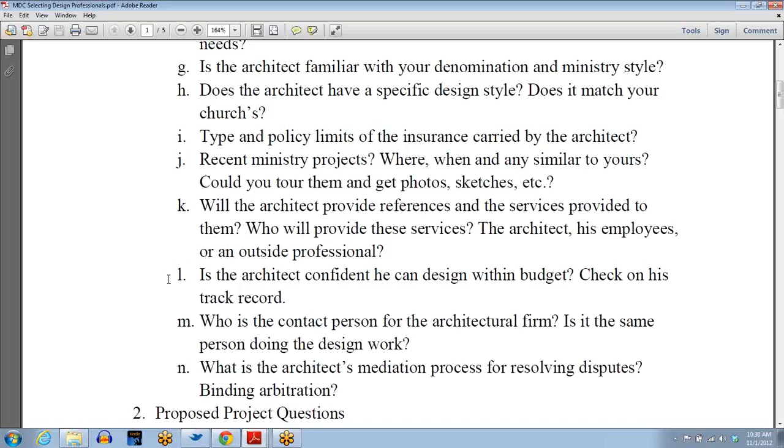An important question is: is the architect confident he can design within budget? So you want to, don't take his word for it, check on his track record. Another question I would ask, if you could hunt up churches that he designed plans for that were never built, to find out why they were never built. All you're trying to do is see who works with diligence and is persistent and consistent to work with churches who design buildings that they can afford and do choose to build.

Now, before you're too hard on the architect and engineers, there's a lot of wheels in motion here, and a lot of them are not controlled by our friends, the architects. These are very fine men that I've worked with, and my personal friends, not just friends as an industry professional or industry partner. And so I don't want to malign them in any way in this. I just want you to make wise choices. I have no axe to grind with anyone. I simply am representing Christ and his church.

Now, is the architect confident he can design within budget? So what you're asking him to design and what your budget is, as we've gone through those steps, he needs to look at that and make certain that he can do it. And what are you going to get? A Chevy, Buick, Cadillac, or a blend of those three together in some way?

Another question to ask him is, who is the contact person? Is the same person doing the design work? Comes back to my earlier comments about one guy you're talking to and somebody else is doing the work, and you don't end up with it going well. So if that architect's going back to his studio and is working with the engineers and his design team and he is hands-on, you probably have a better chance to get the building designed as you related, as you communicated, as you desire it, than you will if there is a gap between and the guy taking the information's not on the scene.

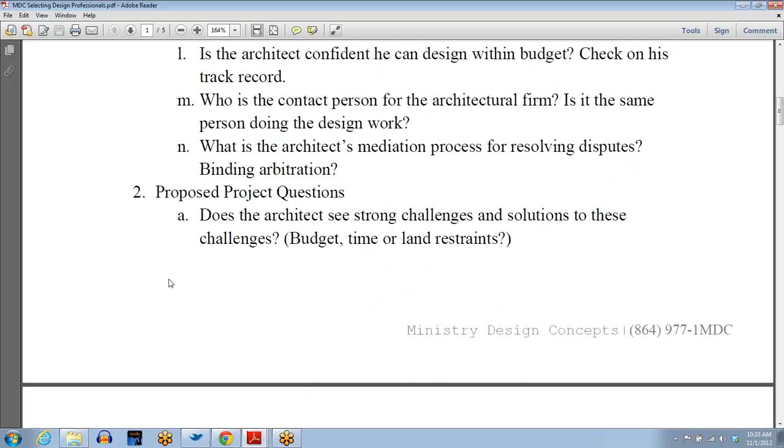Proposed project questions. What do you ask them when talking about your project? Does the architect see strong challenges and solutions to these challenges - budget, time, or land constraints - as he looks at your project? Before the architect meets with you, has he done any homework to look at your land and any restrictions, your zoning, anything he might need to know to talk with you squarely? Because he is vetting your project while you're vetting him, screening him. So does he see anything there?

How does the architect understand the church's value, vision, mission, game plan, goals, and constraints? Can the architect explain this in his own words? One way to make certain he is understanding who you are, your ministry design, and your wishes is to have him repeat those back to you. So once you've given it to him, wait and meet again or call and ask him to repeat back to you, ask him questions that get him to show what he knows. What has he retained of what you've told him? That will go a long way toward helping you understand how he's going to retain and synthesize all the information to give you the building that you want.

Can the architect meet your design schedule? You hire a guy and he takes 12 months to get the design ready, but you wanted it done in 4 months. Talk to him about the design schedule.

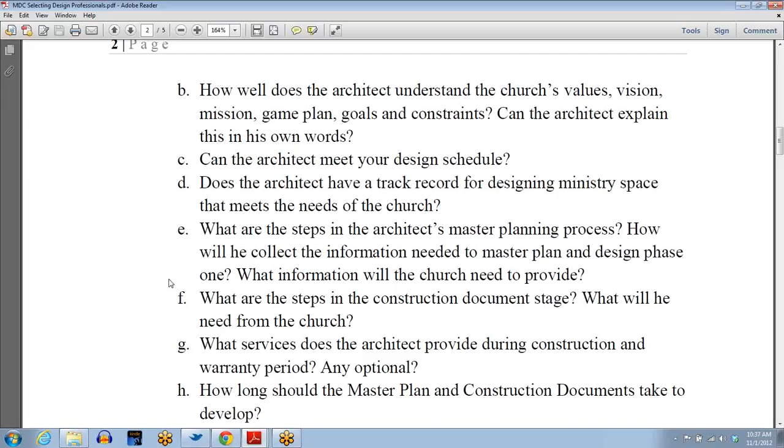What services does the architect provide during construction and the warranty period? Is it separate from his construction drawings and master plan period? You want him there, by the way, but you want to know what he charges and how often he's on site, what kind of support he gives.

You want to know what kind of support he gives regardless of the delivery system you're providing—design-build, design-bid-build, or construction management—because the subcontractors are going to have questions. Is the architect going to be involved and willing to answer those questions, make clarifications and decisions, so the subcontractors and suppliers can get their questions answered.

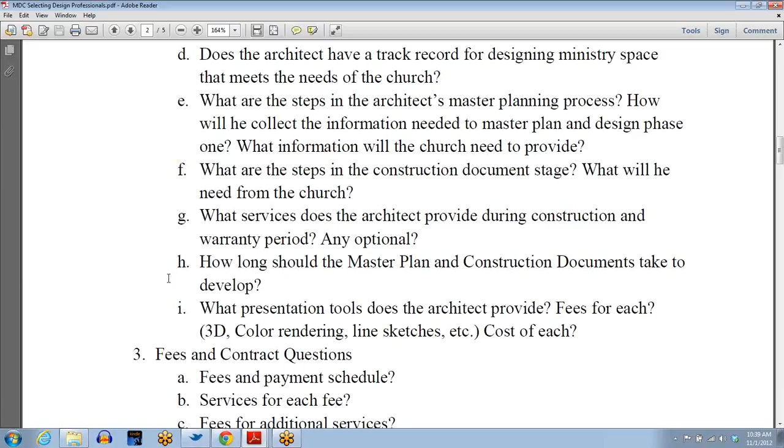How long should the master plan and construction documents take to develop so they're ready for stamping and permitting? What presentation tools does the architect include, and are they in-house or out of house? Is he subcontracting that work, or does he have staff producing it? You want to know who's doing the work and providing the services—is it the architectural firm, or is he employing others, or letting them contract directly with you? You just need to know, because he who holds the contract holds control. You might save money, but you might also lose control. So look at your cash and your control, the risk they're taking and the rewards you get.

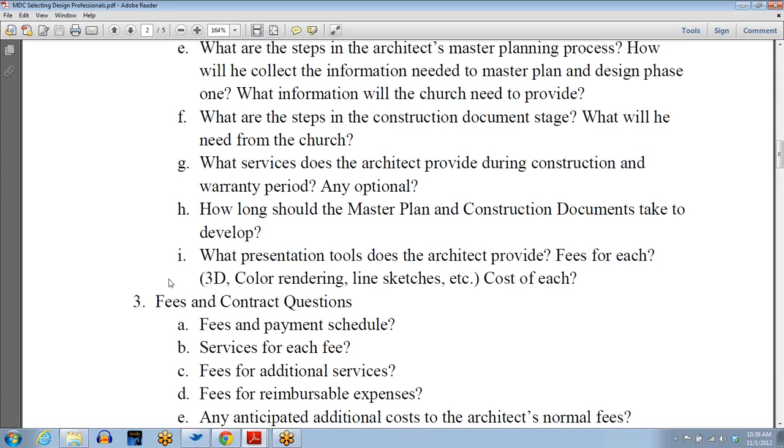Now moving to fees and contract questions. What are his fees and payment schedule? Is he going to front-end load you with fees and payments? Is he going to nickel and dime you through expenses? Make him break down his services for each fee, and fees for each additional service, options of adding services, and reimbursable expenses.

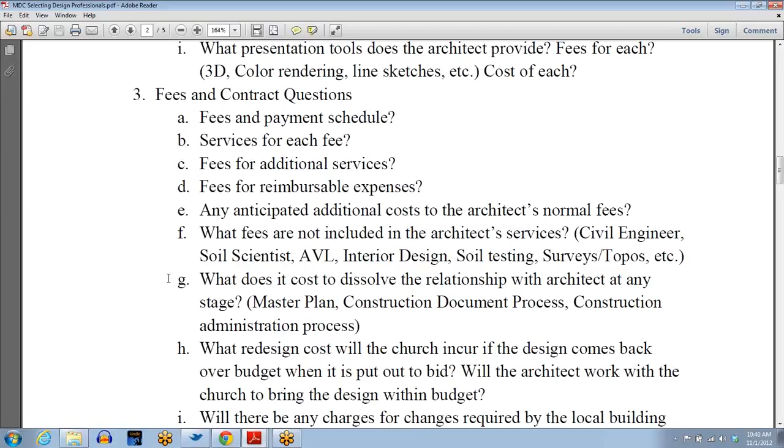If you have him come back to you over and over and he lives 150 miles away, he's going to charge you a mileage rate. If he has to spend the night, he'll charge for lodging and food, and you want to know what those are—any anticipated additional costs to the architect's normal fees.

What fees are not included in the architect's services? I've listed some choices there for you. What does it cost to dissolve the relationship with the architect at any stage? What redesign costs will the church incur if the design comes back over budget when put out to bid? Hopefully we're heading that off by doing updated cost estimates as we go through the process. Is the architect going to work with the church to design within budget?

Why do I harp on that? The reason is that from talking to numerous Christian architects—men who know the Lord and design churches—not one has told me the percentage of churches whose designs come back over budget when put out to bid is under 50%. I've been told as high as 75% of the time, when an architect designs a set of plans without a builder who has skin in the game estimating the cost and holding accountability, it comes back over-designed 50 to 75% of the time.

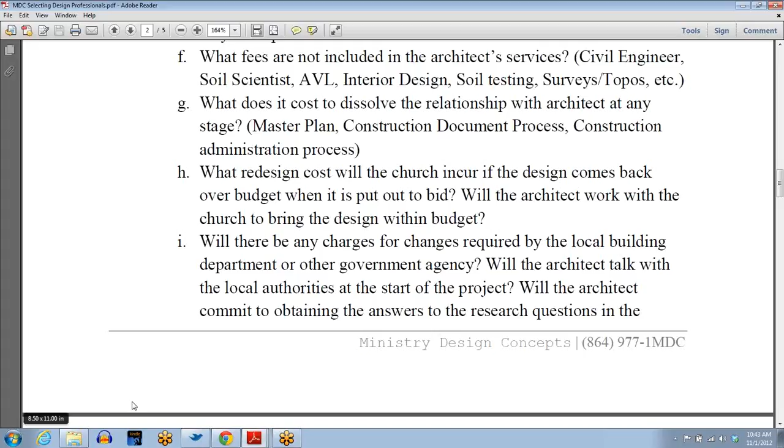Will the architect commit to obtaining the answers to the research questions in the master plan research questionnaire I've given you, or will he design first and research afterwards? You don't want one that does the design and then goes to research it to make certain that it's within design. Get one who will take the time to research it and get confirmation of all the things in the questionnaire I gave you on the master plan research questions.

I gave you 23 questions. It was taken from this site selection questionnaire, and that's a 9-page document full of questions. You want to make certain they're not just designing it without thought of doing anything other than taking your money, because you want to be able to build it, don't you?

What is the fee structure or fee schedule for change orders after the plans are complete? You change your mind, the government changes their mind, the architect had mistakes in the plan that had to be changed during design. That costs money. Catch them during the design phase, not during the construction phase.

You're likely going to have one or many change orders that require the architect to adjust the plans. What charges do you incur from him for that? His fault, your fault, the government's fault, nobody's fault—it happens. What are you going to be charged? Who is financially responsible for correcting errors and omissions in the design?

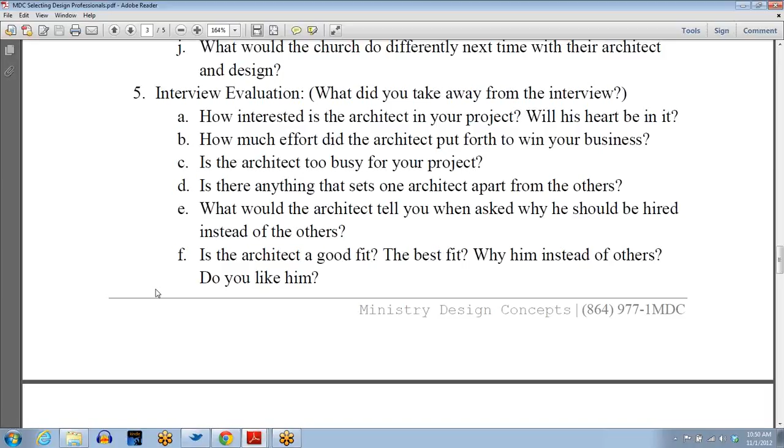Is the architect a good fit, the best fit? Why him instead of others? Can you explain that to your congregation? Does the architect understand you? Will he be easy to work with and put the interest of the church ahead of his own interest?

Here's the truth, what I call a truthity. Some architects are great salesmen. They interview very well but perform poorly. Other architects interview poorly but perform great. You've got to get behind the curtain to see what kind of work they're producing right now, and estimate whether or not they fall into one of these categories. Because there are guys who interview poorly and perform poorly, or interview great and perform great. You've got to find out who that is by being an investigator.

Is the architect qualified for your project? Now let's move from that and talk about another area: civil engineers. You can hire an architect that lives in Kansas while your church is in Alabama, and he can design the building according to the codes and so forth with the engineers. But when it comes to a civil engineer, you want a local engineer who is dealing with the environment right there and kind of has his hands in the dirt. If you understand what I'm saying, you want a local guy.

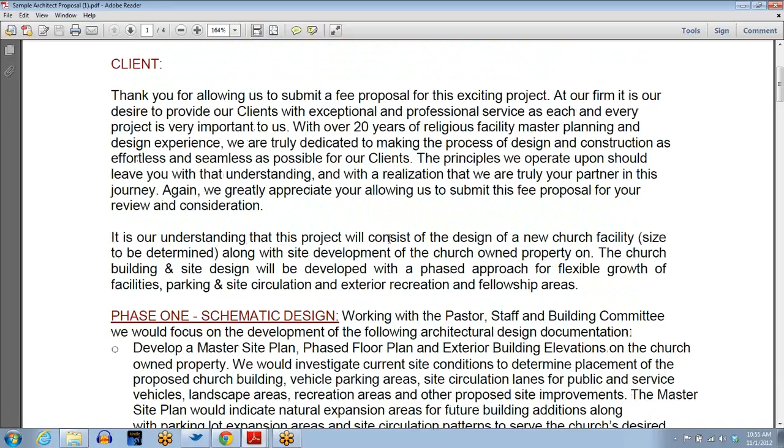This is a sample proposal. As you read down through it, you may find they tell you their firm is excited to work with you, that they've been designing religious facilities for X number of years, and that they operate upon certain core values that guide the way they serve you. They give you an understanding of what they think the project consists of—what work, size, cost, and so forth.

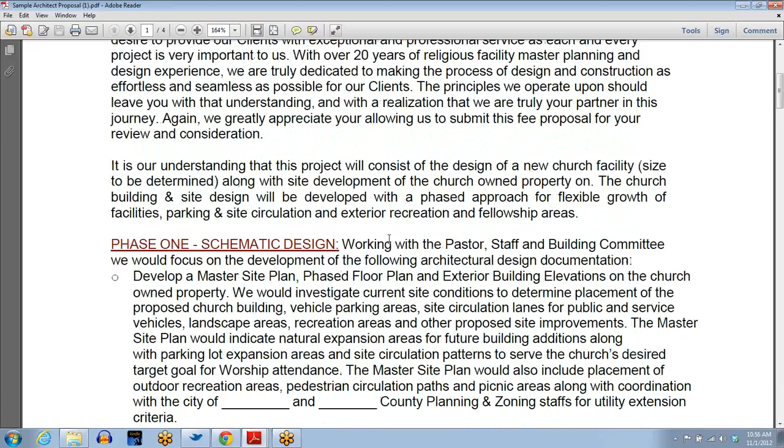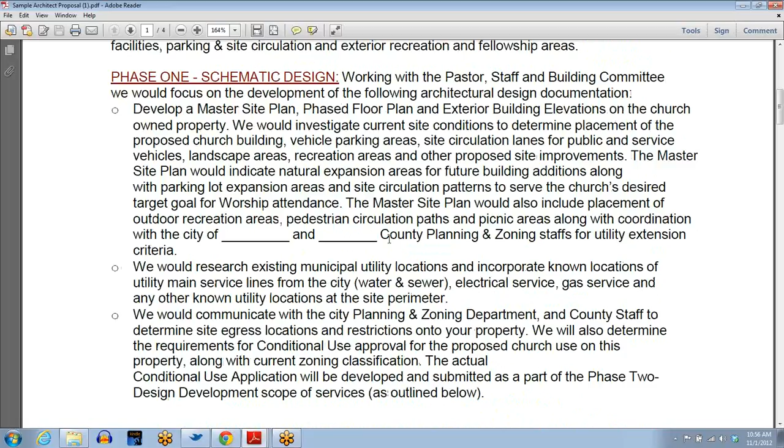Again, this is just a sample, but they'll put those in the first couple of paragraphs, perhaps. Then they'll talk about the master plan—they may call it a phase 1 schematic design, so it's a master plan with a floor plan, an elevation, and a site plan. They'll mention working with the local government authorities, the church, and anyone else involved.

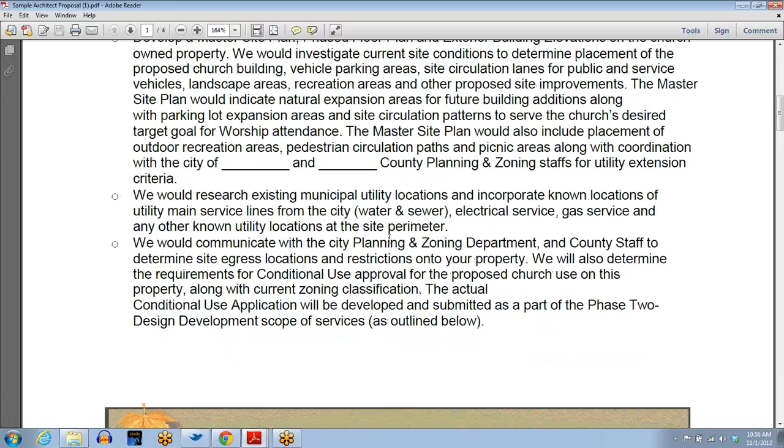They're going to research the existing municipal utility locations and work with the Board of Zoning and Appeals, the Planning and Zoning Department, and the county or city staff, going through and doing their research. That's what they're telling you in the proposal. So those questions I was asking, these guys are answering part of them in this sample, and I want you to see what it may look like.

Now, this particular sample used our MDC long-term planning vision for the church campus and the church facilities planning questionnaire. These are things I had given to a church to do, and this sample included those. So in my navigation, I'm providing these so you can give the architect the information he needs—part of your training to help you prepare to go through the master plan.

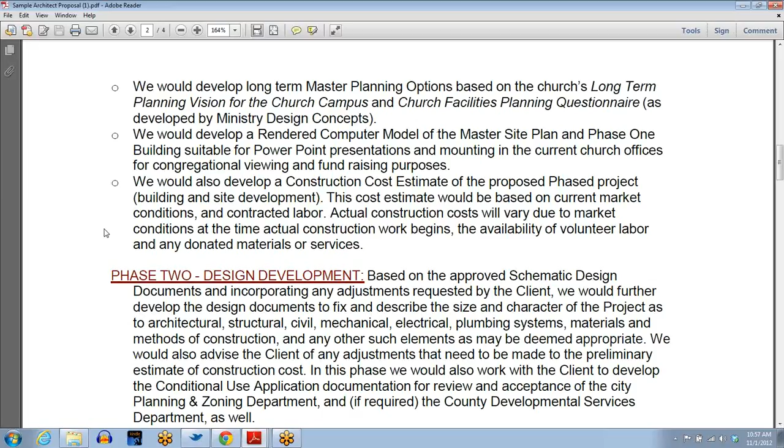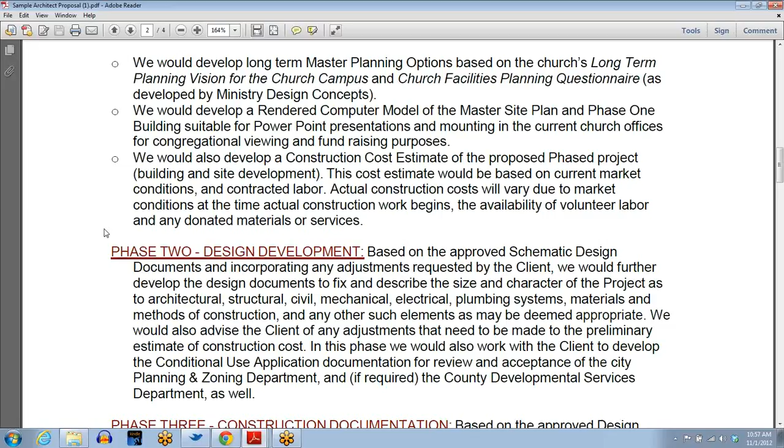He's telling you what he's going to provide: we would develop a rendered computer model of the master plan in phase 1, and we'll develop a construction cost estimate. Here the architect is doing it—but I'm telling you to get builders involved, either one you've hired who works with the architect during master plan, or 3 or 4 general contractors who, for the privilege of bidding your project, give you real cost estimates as they're developed, all to keep your building within budget and help perfect the design. Phase 2 is design development.

This is where they're going to go through, and it's kind of in between the master plan and the construction documents. They're tweaking it and doing some other things, working with the local government to make certain that what you're planning to do is within it, and they're determining the size, aesthetics, and character of the project so that you're aligned.

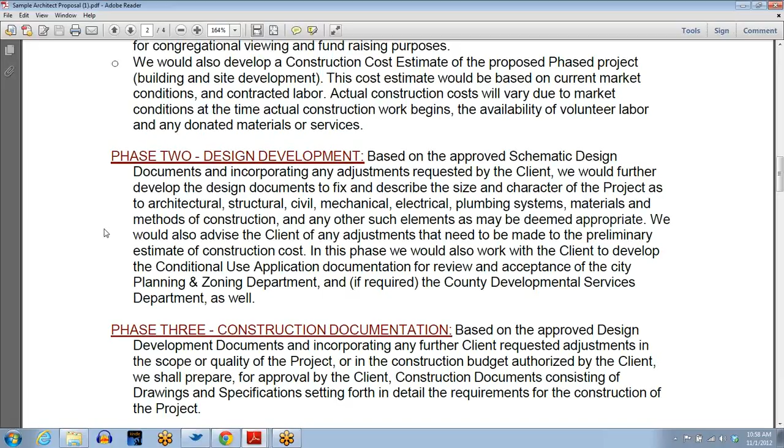Again, it's a step to help you move toward phase 3, which is the construction documents. Once you get to this phase, you don't want to be changing things during the construction document phase. You're doing that during phase 1 and 2, hammering out and finalizing your decisions.

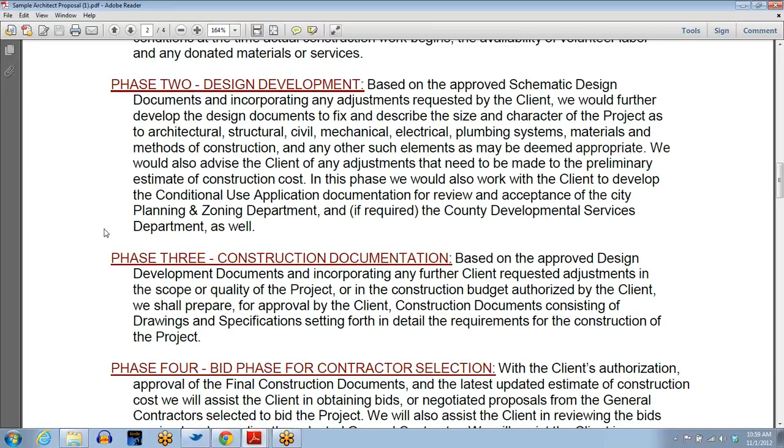The architect's giving you time for your decisions to marinate and for you to meditate on them, so that you've thought through how you're going to use the space and tried to walk through his plans in your mind's eye, considering the ramifications of every cubic square inch of your facility.

Because when you get to the construction drawings, if you come back and keep making changes, at some point they're going to start charging you redesign fees, since you didn't do it during the first two phases. You wanted to wait and not really bear down on yourself during phase 3.

Now, if I'm your pre-construction navigator, I'm helping you do this and facilitating it as a helper. I'm not an architect and I'm not a builder. I'm a pastor who has built churches and worked professionally as a project consultant for nearly a decade to help churches through this. That's my role - a consultant, a coach, a navigator.

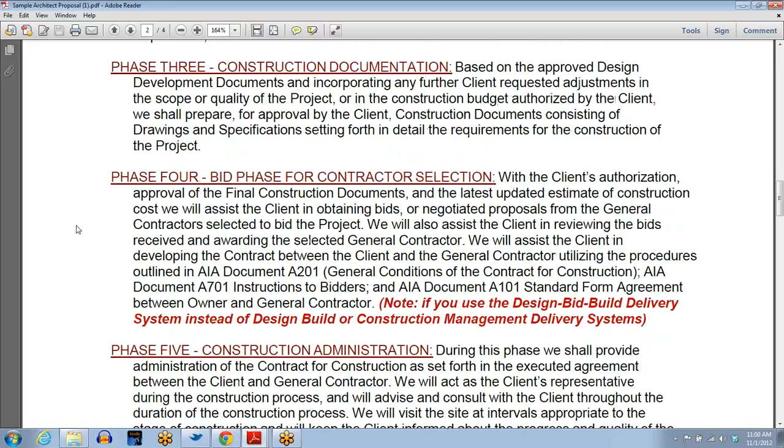Now you get to phase 4, where you're bidding it out to 3, 4, 5, or a whole bunch more general contractors who are going to give you a price. So depending on the delivery system you've used, you've got a bidding process.

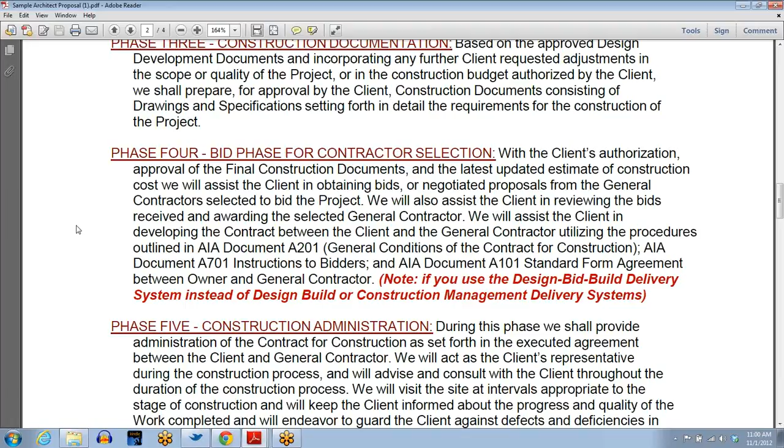You have a bidding phase with construction managers. You probably have one with the design-build guys as they pull together and put together the bids, but you may not have any access to them. And certainly with the traditional way - design it, bid it out, and build it - you have a bid package that goes to the general contractors for them to give you prices. It all depends on which delivery system you use.

And then there is the construction administration phase, during which the architect will serve you for a fee. You need to know what he is doing, how often he is there, how much support he's going to give, and how he is going to interact with all the subs and the general contractor to help you get through the construction phase safely.

You want to end up with the building being built correctly. So here is a list of things to consider.

Will they review and verify payment applications from the general contractor or from your construction manager if you're using the delivery system of construction management, pure agency or at risk? Will they review submittals, shop drawings, product data, and samples to confirm the quality of the work and the products being used? You want to know what they're doing for you, and you want to compare apples to apples with other architects as you select them.